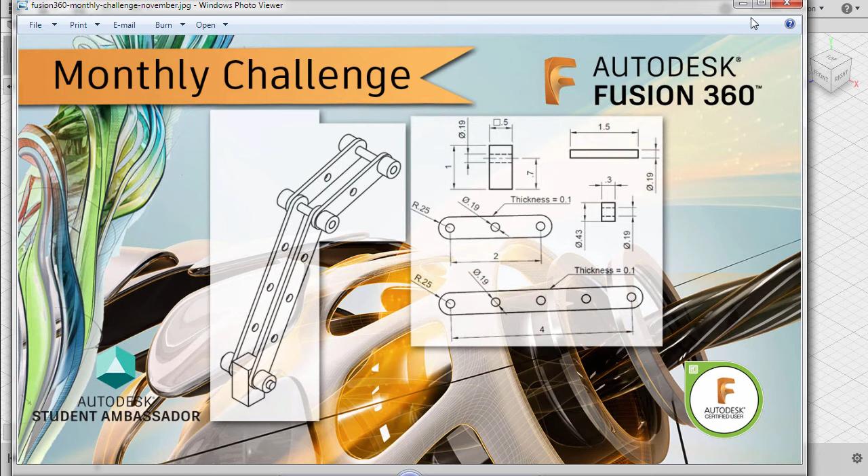Heading to our main file, right-click and select New Component. Left-click and left-click once more to rename our new component. Let's name this as Base. Hitting Enter. Keep in mind, whenever we are working on a specific component, it should always be activated.

Our base already activated. Before we start sketching, let's change our units into inch. Hitting OK, grabbing our rectangle by hitting R and selecting our XZ plane. Let's change the rectangle options to center rectangle. Let's now drop our center point at the origin.

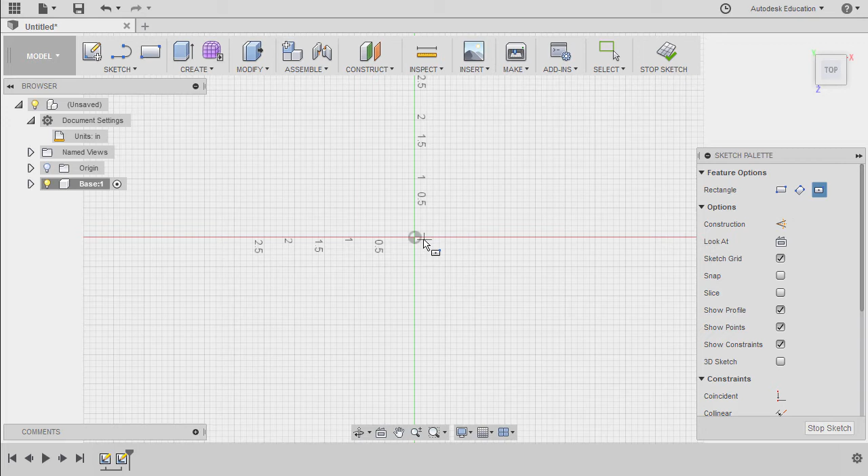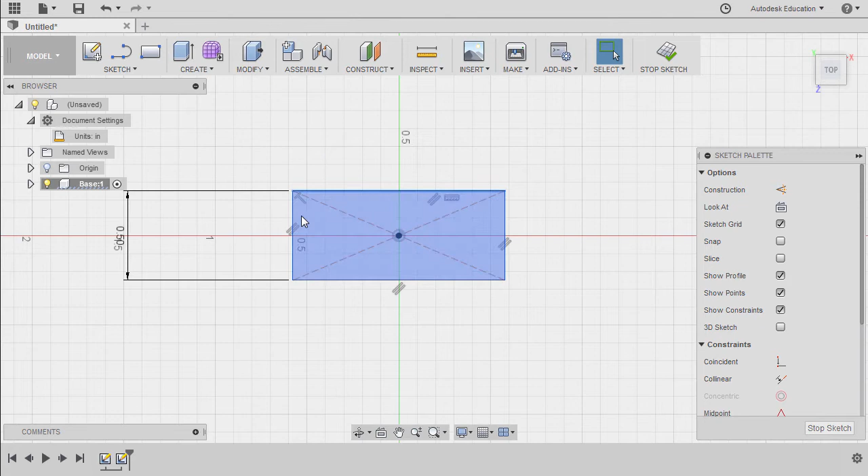According to our 2D drawing, this is a square. I'm going to key in 0.5, hit Enter. Zoom in, select this top horizontal line, left click and control left click this left vertical line, right click and select equal. So it turned into black, meaning it's fully constrained.

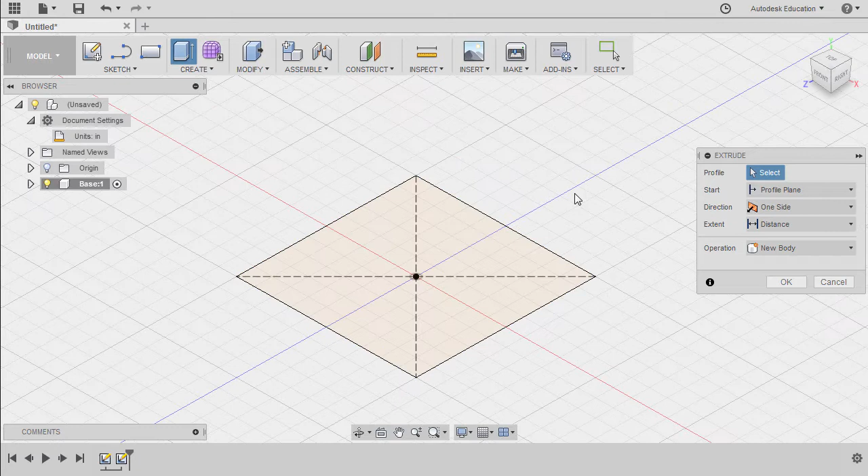Let's grab our extrude tool by hitting E. I'm going to go to our home view. Prompted to select a profile, selecting this square profile. Let's drag this arrow up, the height to be 1 inch. Operation New Body and hit OK.

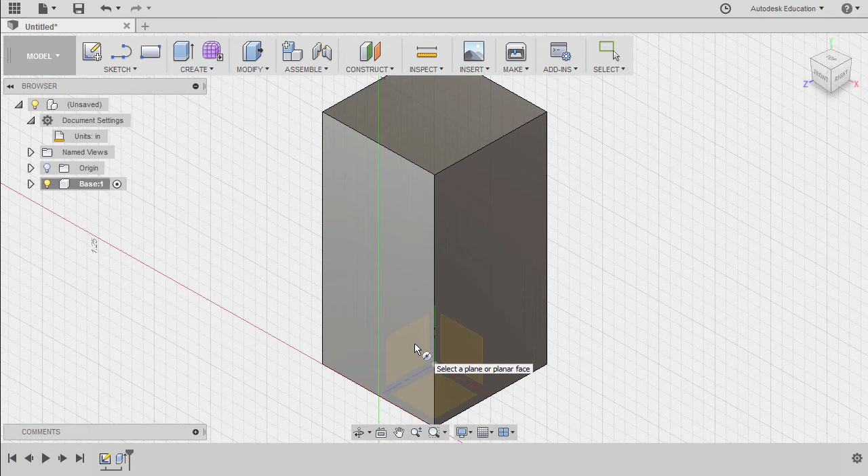Next, let's create the hole here, hitting C for circle. Let's sketch on our YZ plane. Notice as I hover over our YZ plane, Fusion 360 informs us that if we perform a left click, this face will be selected. Now in order to select nested items, all we have to do is hold our left mouse button and a drop down will appear. So in this instance, our intent is to select our YZ plane.

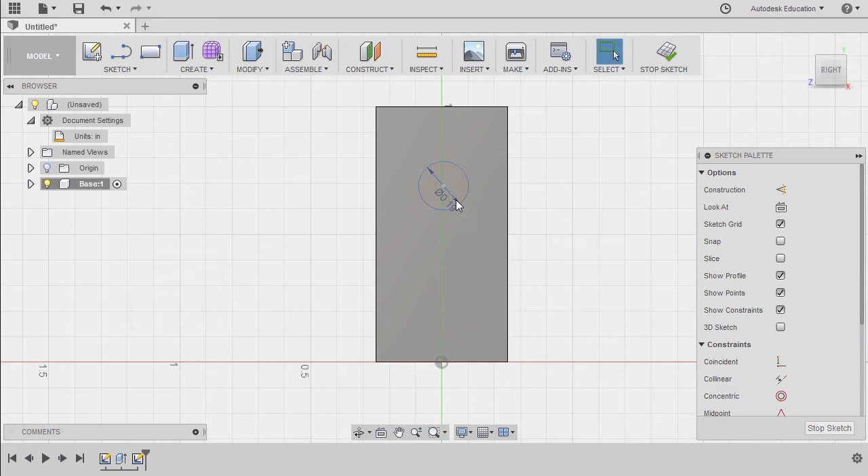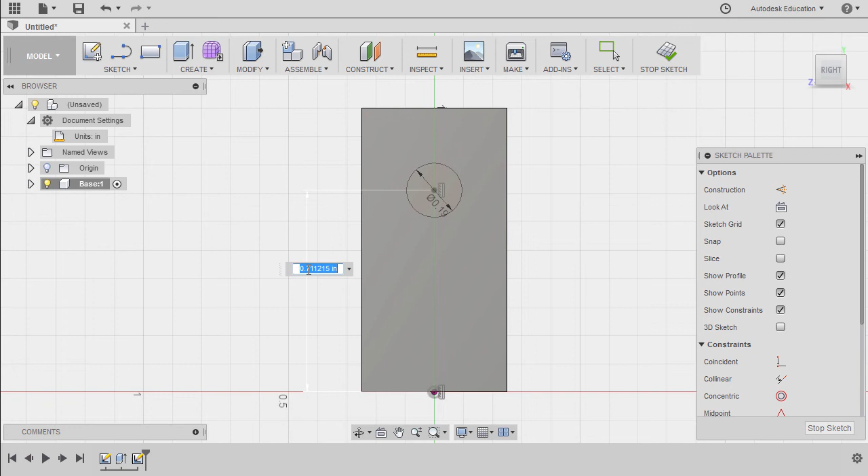Let's drop our center point here, diameter to be 0.19, hitting Enter. Next, our intent is to align our center point with our origin vertically. Let's grab our horizontal vertical constraint, select our center point and the origin. Hitting D for dimension, selecting the center point and our origin. Left click here to place our dimension, keying in 0.7, hitting Enter.

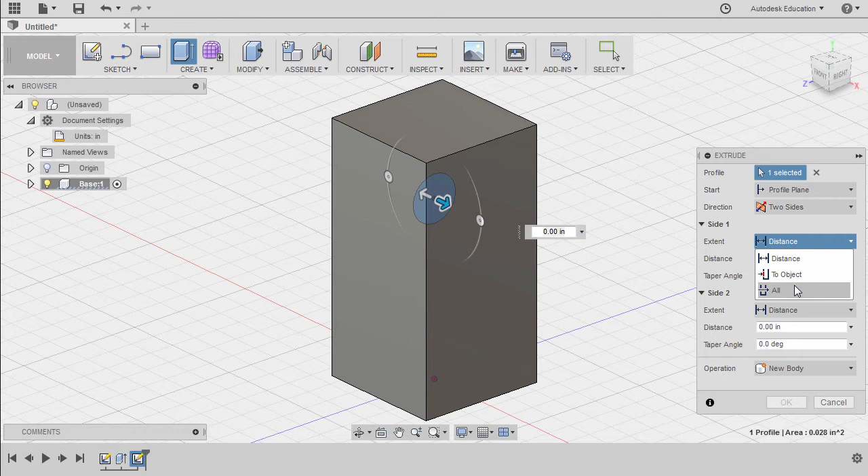Next, let's hit E for extrude, making sure our selection mode is window, creating a window selection to select the circular profile. Let's change the direction to 2 sides, and I want both sides to have an extent to all. Operation cut and hitting OK. Going to home view.

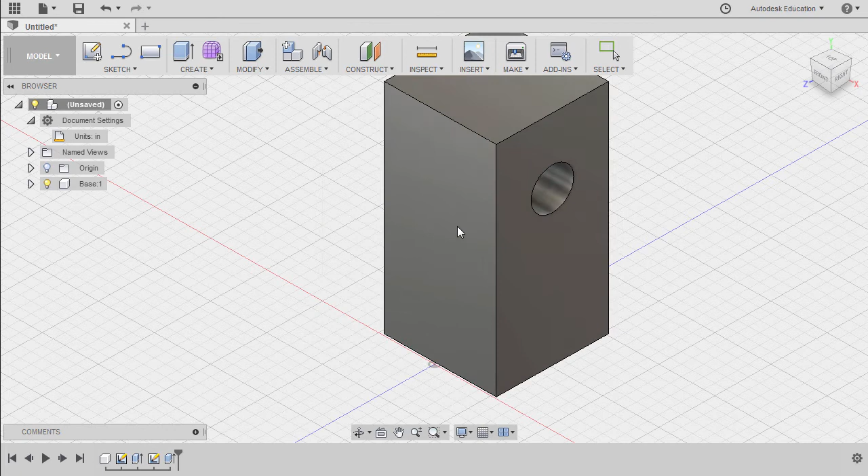Another very important tip is to always ground your parent component. So heading to base, right click and select ground. Now by grounding an object, we are simply removing all its degrees of freedom. Let's move this component, holding our left mouse button, we can move our component. I'm going to hit undo, going back to base, and finally selecting ground.

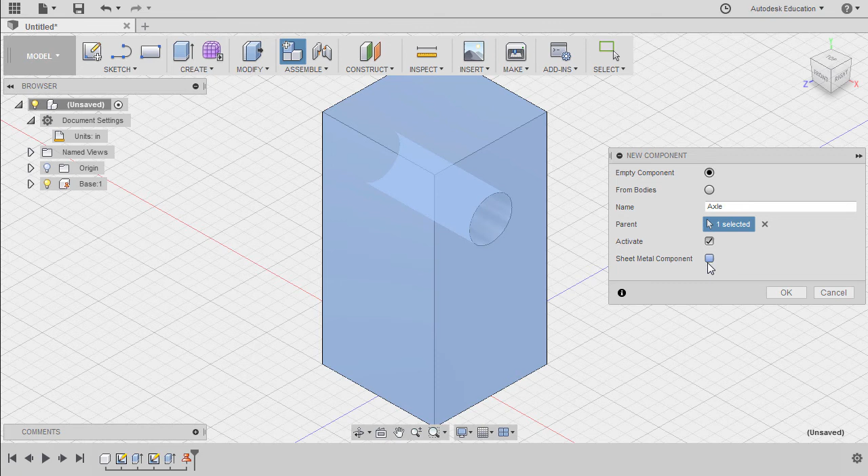Next, let's model the axle, going to our main file, or let's head to assemble, select new component. Let's name this as axle. The parent to be our main file. Next, we want our new component to be activated. Lastly, we are not creating a sheet metal component, so let's leave this unchecked, hitting OK.

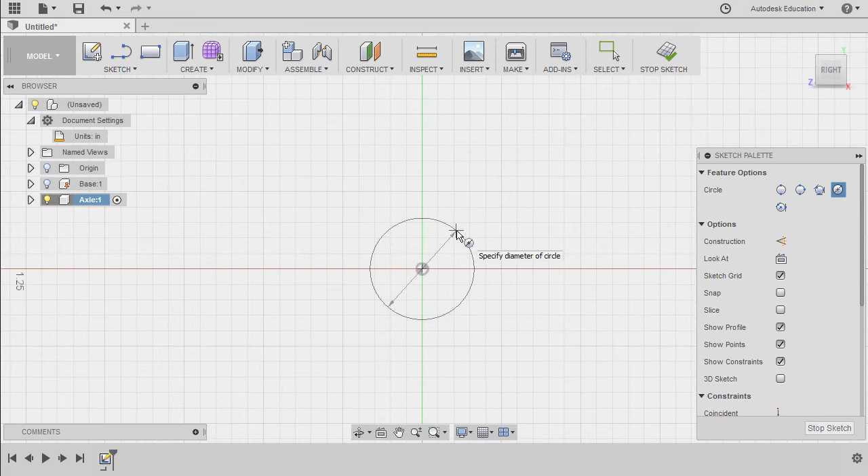And if the silhouette of our base is bothersome, we can head to our axle, right click, and select isolate. Next, hitting C for circle. Let's sketch on our YZ plane. Drop our center point at the origin. The diameter of the circle is 0.19, hitting enter.

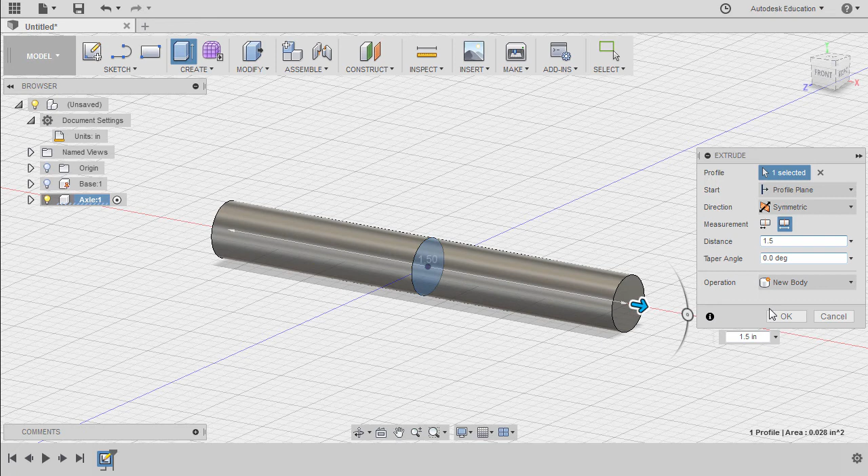Hitting E for extrude, selecting this profile. For direction, let's change this to symmetric and the whole length to be 1.5. Operation new body and hit OK.

Create another component, heading to our main file. Right click and select new component. Let's rename this to collar. Hitting enter. Right click on collar and let's select isolate.

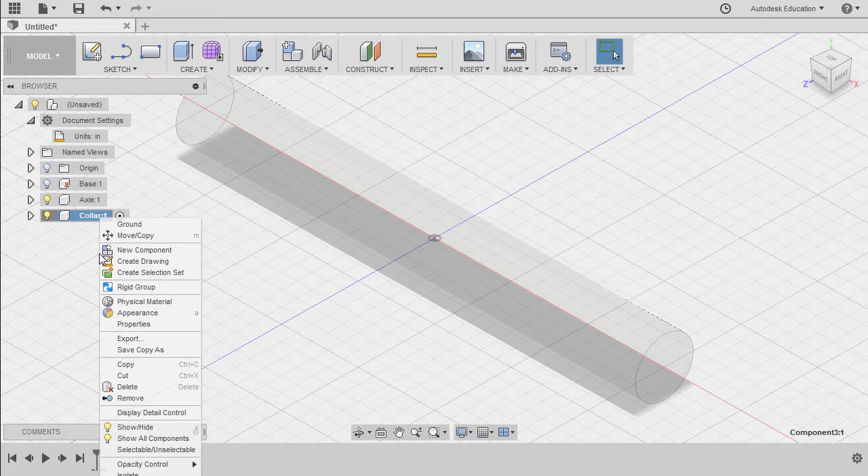Hitting C for circle, selecting our YZ plane. Diameter for our outer circle to be 0.43, hitting enter. Inner circle to be 0.19, hitting enter twice.

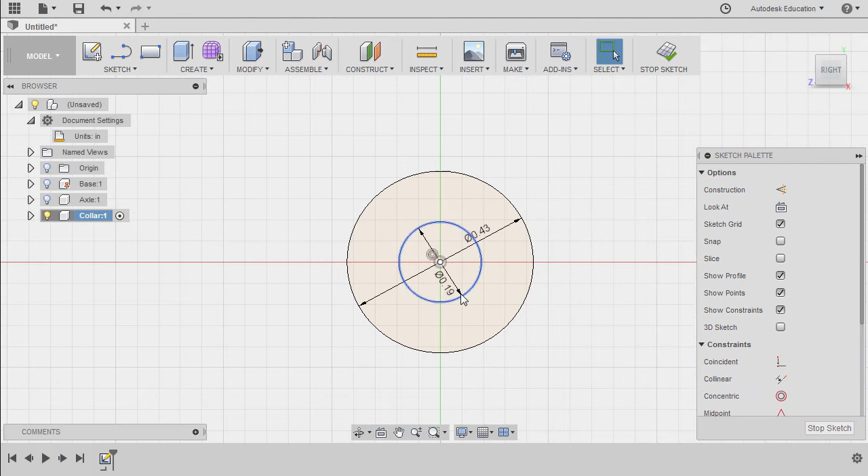Hitting E for extrude, selecting our profile, changing the direction to symmetric, whole length to be 0.3, operation new body, and hit OK.

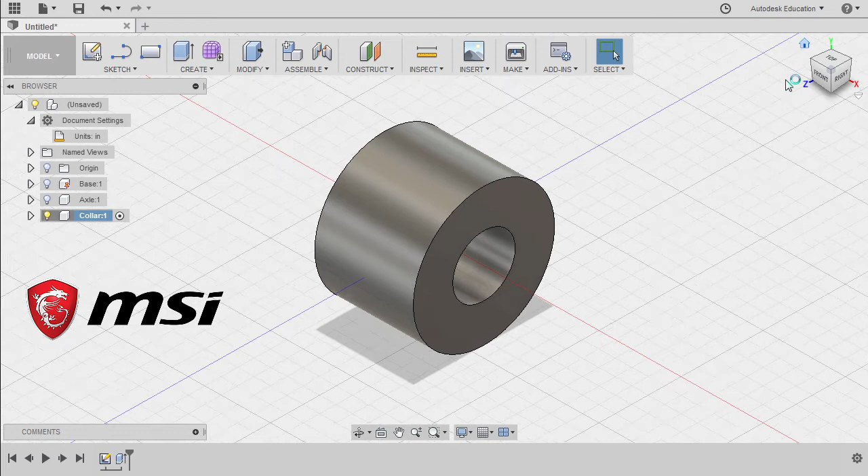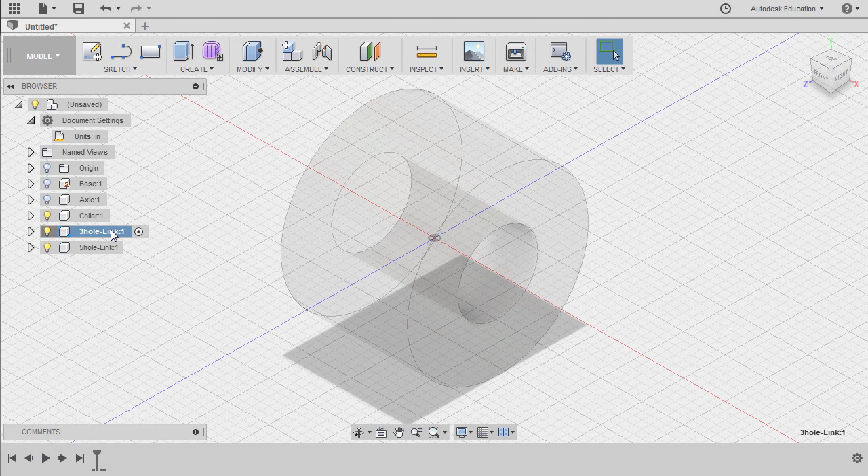Next, let's create the 3-hole link. Going to our main file, right click, selecting new component, naming this as 3-hole dash link, hitting enter. In addition, we can also create the 5-hole link component immediately. So right clicking, selecting new component, naming this as 5-hole dash link, hitting enter. And of course, we will be working first on 3 holes, so activating this component, isolating this as well, right click, selecting isolate.

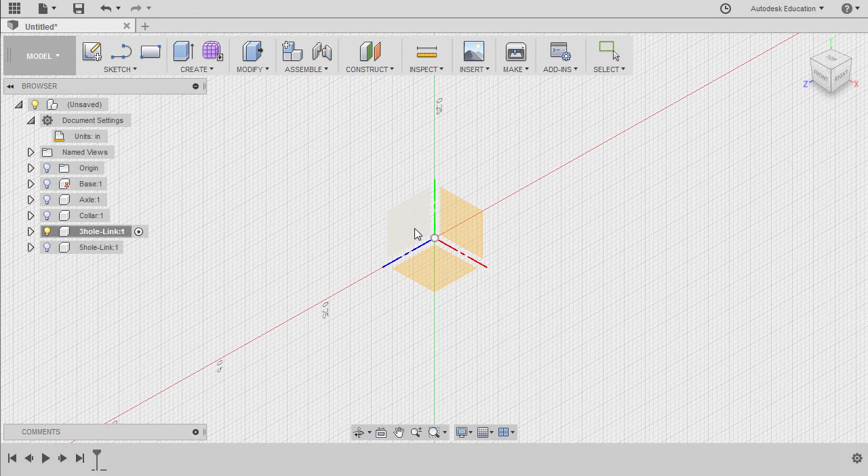Let's grab our slot tool, hitting S. To grab our model toolbox, typing SL. And selecting center to center slot, and we'd like our slot to be placed on our YZ plane. Left click here, left click here, and left click once more. Notice we did not enter any value.

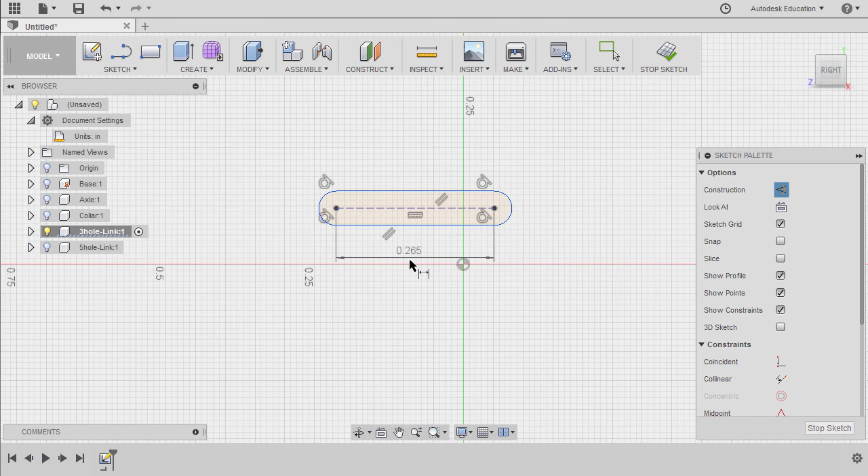Let's grab our dimension tool, hitting D, selecting this horizontal line. I'm going to key in 2, zooming out. Let's select this arc and key in 0.25 for its radius.

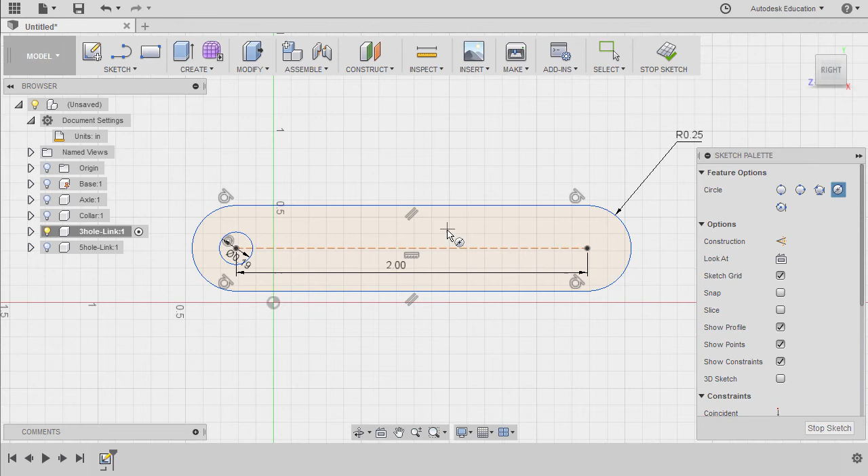Hitting C for circle, create circles that has a diameter of 0.19, hitting enter. Grabbing our circle once more. Let's drop this at the midpoint of this horizontal line. Let's not input any value. Instead, left click immediately, creating another circle here, left click, hitting escape.

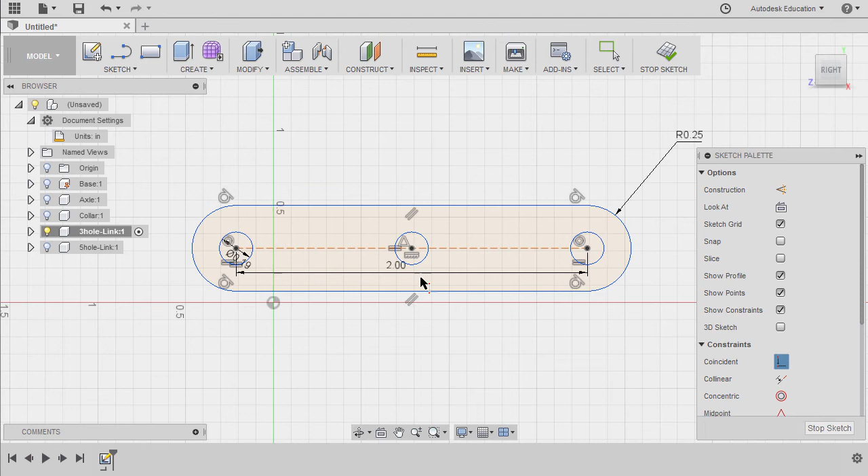Next, let's grab our equal constraint, selecting this parent, this one to be the child, repeating the process, selecting this as the child. Next, let's grab our coincident constraint, grab this midpoint or center point, and place this at the origin. Hitting escape. Let's reposition this dimension.

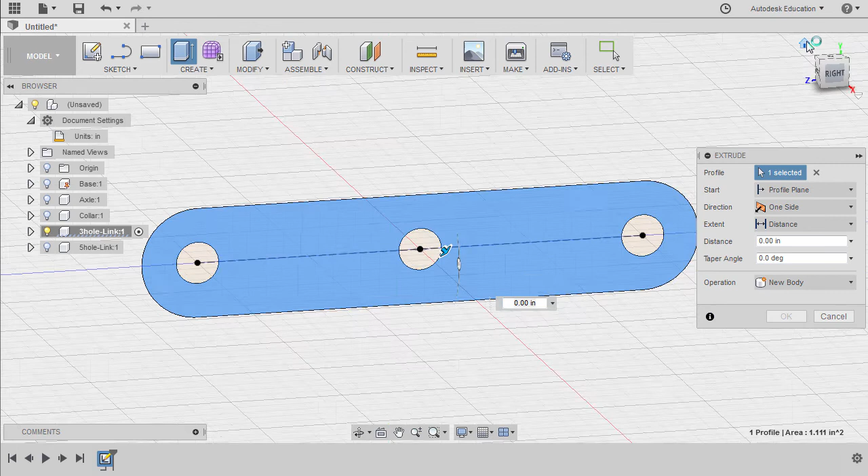Hitting E for extrude, selecting this profile. Direction to be symmetric. The thickness to be 0.1. Operation new body and hitting OK.

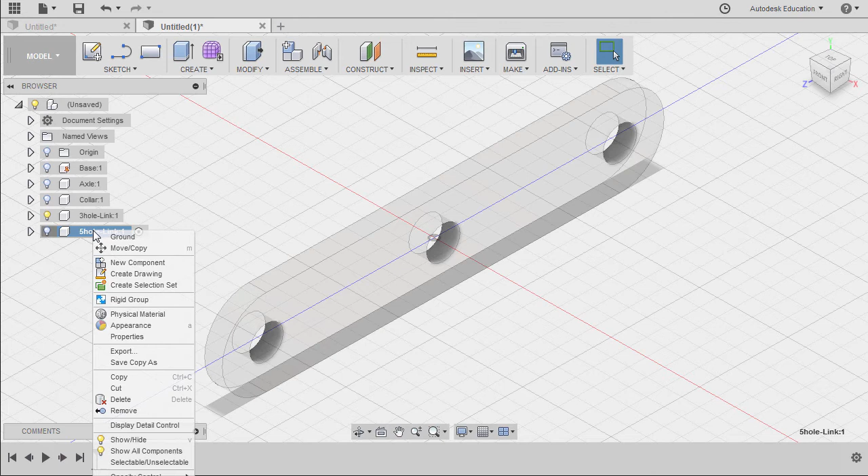Moving forward, let's create the geometry for our 5-hole link. Activating our component, right click and select, or better yet, head up to our main file, right click and select Unisolate All, head back to 5-hole link, right click and select Isolate.

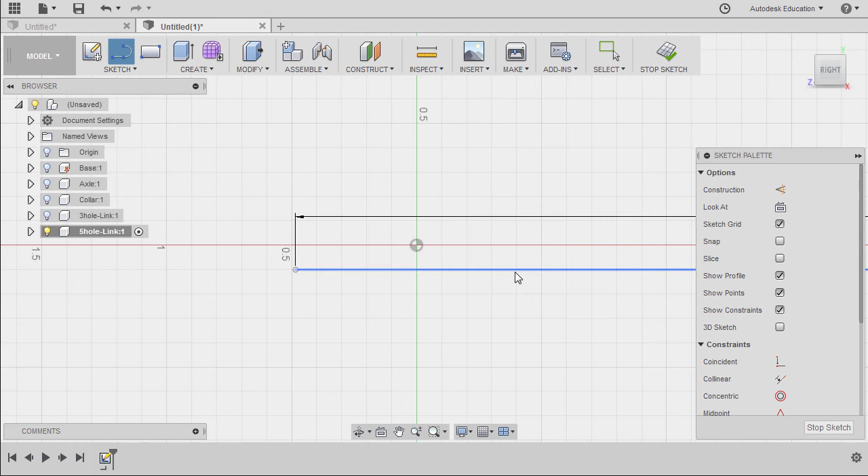Let's grab our line tool, hitting L. Let's sketch on the YZ plane. Let's create a horizontal line, left click here, the length to be 4, hitting enter. Next, I'd like to position this line midpoint to our origin, so selecting our line and our origin, right click, selecting midpoint, zooming out. This line is a construction line, so selecting this, hitting X.

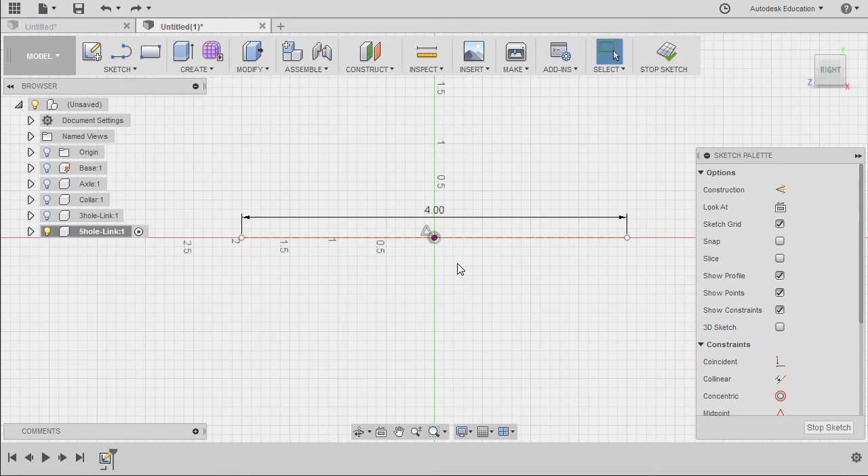Let's grab our circle, hitting C. Let's place our first circle at the endpoint. Diameter to be 0.19. Creating another circle on this other endpoint. Left click. Notice that the holes for this slot or the circles are evenly spaced.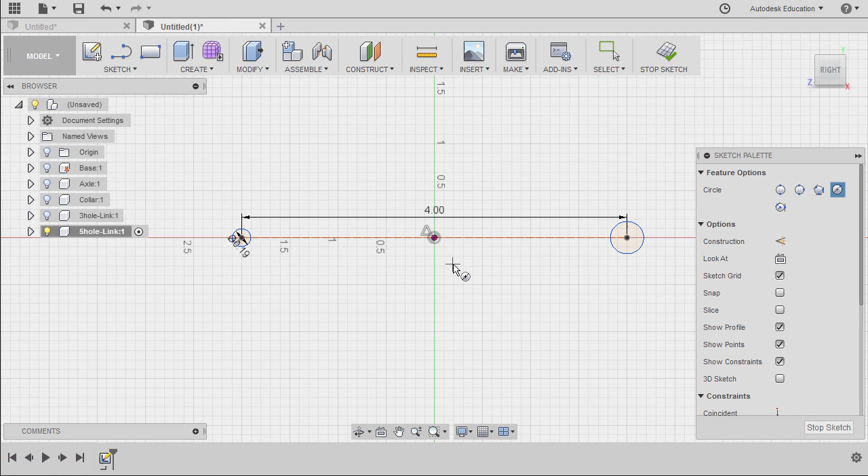Our strategy for this moment is whenever this dimension is modified, all of the circles should retain its equal distance. To do this, let's first create our third circle here at the origin.

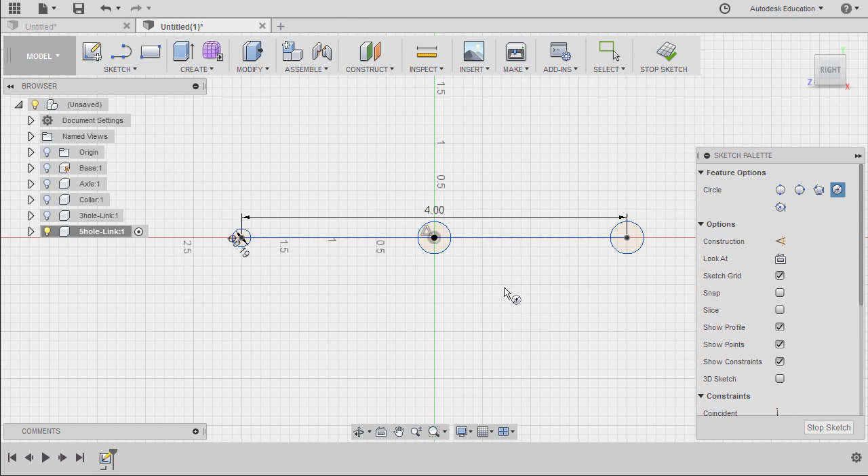Left click. I'm going to hit L for line. Create another line from this circle to our origin. Double left click. Creating another line from our origin to this circle. Double left click. Next, grab our circle and drop the center point at the midpoint of this line. So creating another circle at the endpoint, left click.

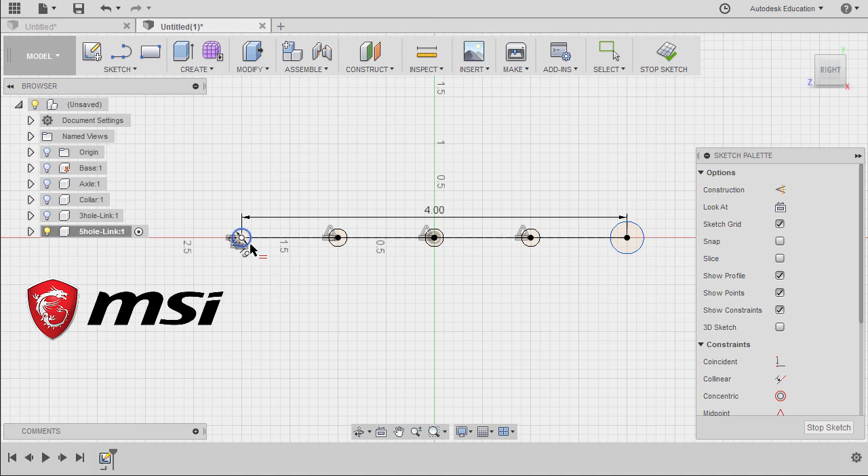Let's now grab our equal constraint, selecting the parent, this to be the child. Finally, this circle, hitting escape. And to check, let's change the dimension to 6, hitting enter, and confirm our circles adapted and retained its equal spacing.

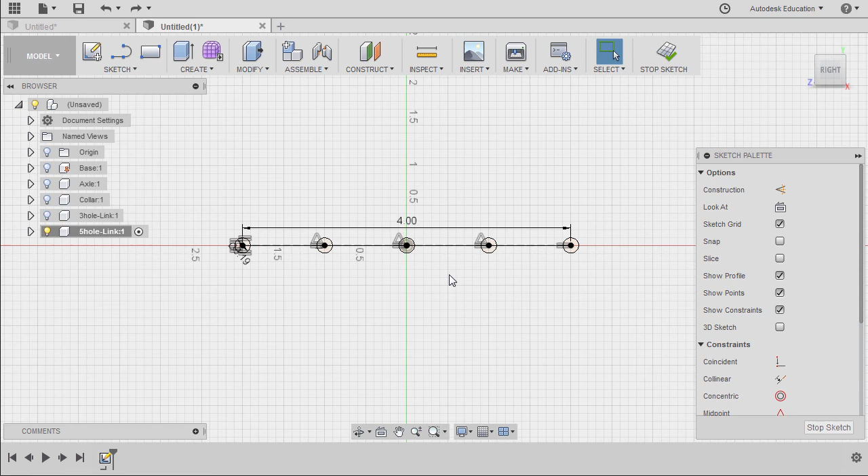So hitting undo. Let's now create the slot using our line tool, hitting L, creating a line, holding our left mouse button to create an arc, release, hold it once again and connect it to the end point, hitting escape.

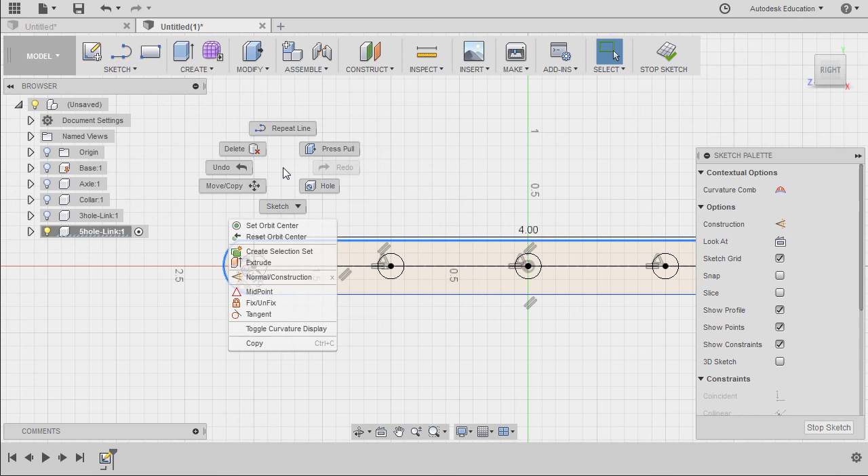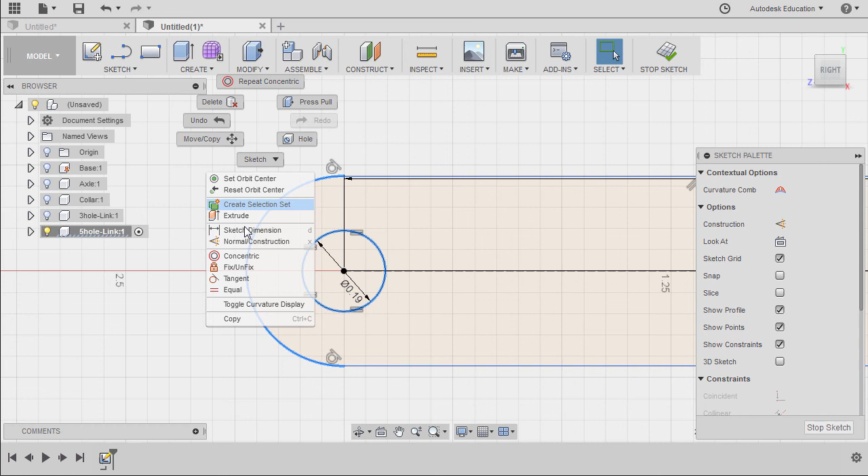Selecting this arc and this line, right click, selecting tangent, same here, this arc and this line, right click, selecting tangent, selecting this arc and our circle, right click, selecting concentric, zooming in, selecting this arc and the circle, right click, selecting concentric.

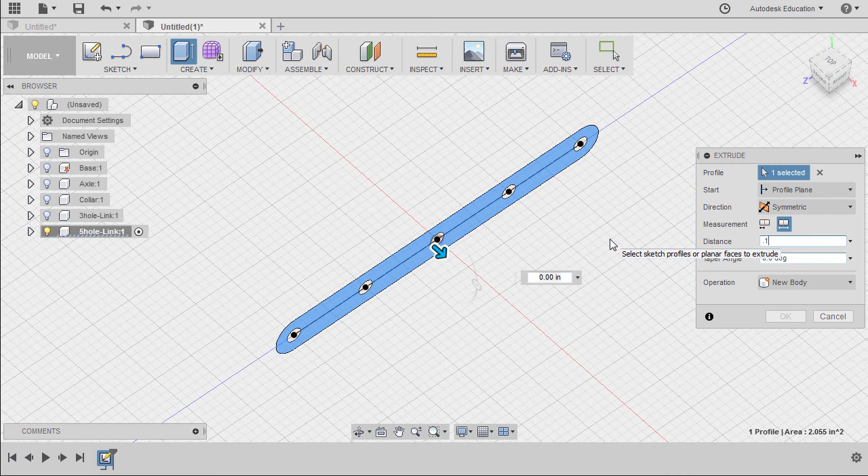Let's move this up. Finally, hitting D for dimension. Let's select this arc and key in 0.25, hitting enter. It's fully constrained, so hitting E for extrude, selecting this profile, direction to be symmetric, our thickness to be 0.1, operation new body, and hitting OK.

In the next video, we will assemble these components and add joints.